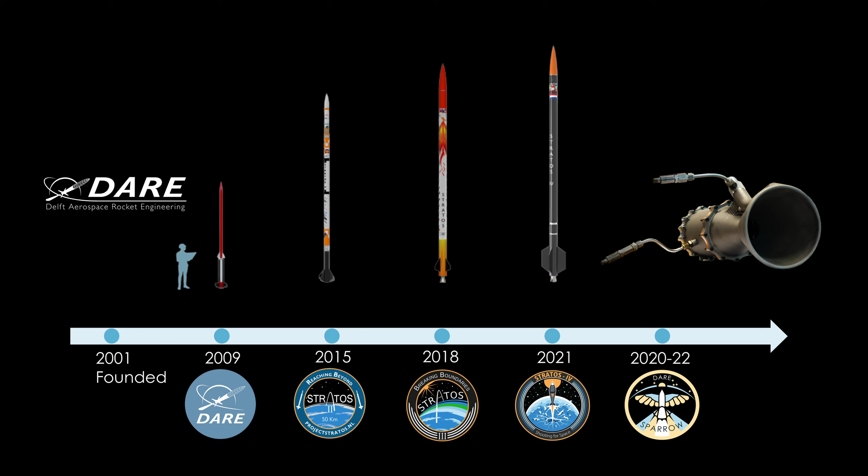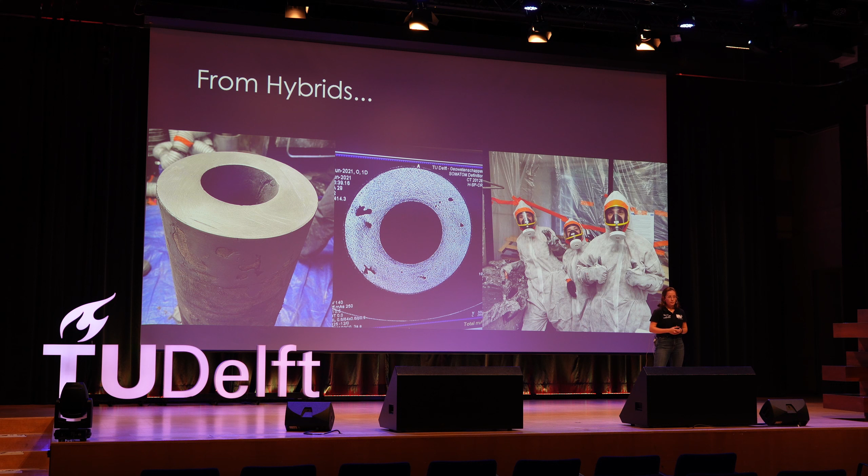Hybrid technology served very well the purpose of Stratos 4. However, throughout the decades we have been developing it, we have also encountered some of its disadvantages. For example, the engine you see on screen, a Nimbus engine of the Stratos 4 team, took over 370 man-hours to manufacture. To put that into perspective, if it had to be manufactured by one person working non-stop without sleep or breaks, it would take more than two weeks just to make one engine.

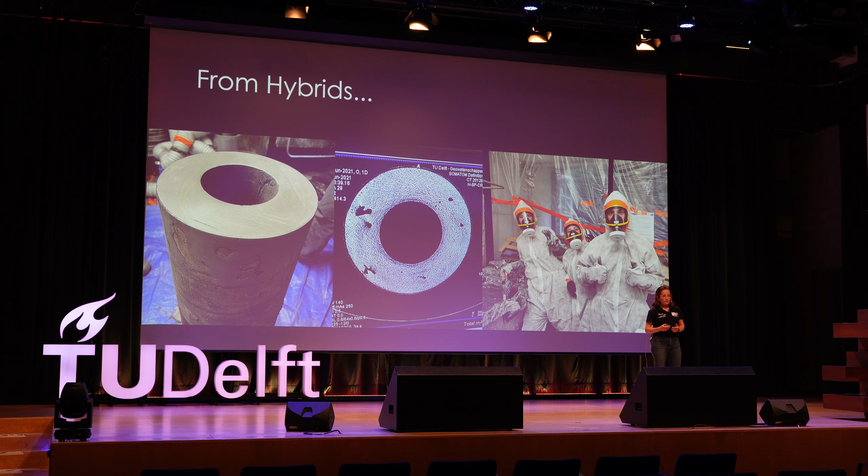So it sounds pretty inefficient, doesn't it? Well, it gets worse. All this work is to make one engine that you can use only once. We were not able to achieve much reusability with hybrid technology, and this also poses a problem when developing an engine, because it can take up to months between one test and the next.

Here you can see the analysis of a Nimbus engine after a test. As you can see, we had to open the engine in two to be able to see its state and how it looked. So you can pretty much not use it again.

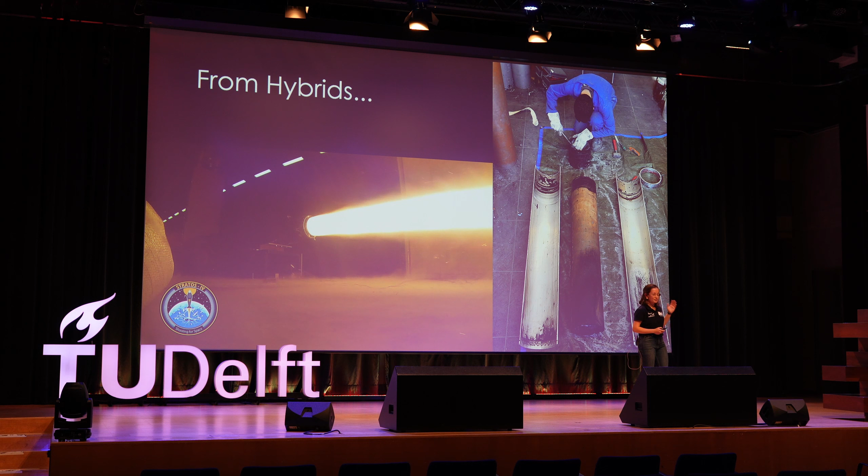So Sparrow decided to move into liquid engines. Liquid engines run on liquid fuel and liquid oxidizer. This means the combustion chamber is empty, and it is the place where both liquids meet and combust. Liquid systems are usually more complex than hybrid ones, but they also offer much higher performance and a more versatile design.

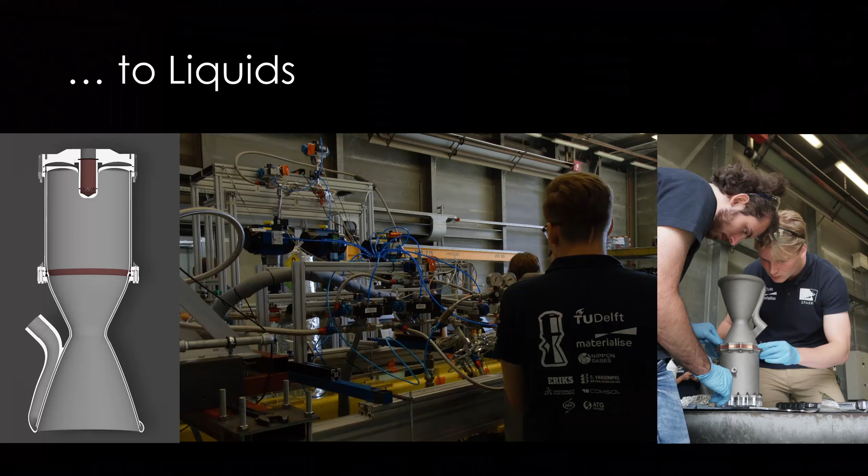The trickiest aspect of designing a liquid engine is making sure both liquids arrive at the chamber at the right time. But the advantage of liquid technology can actually be seen in industry—the majority of commercial rockets out there are powered by liquid engines.

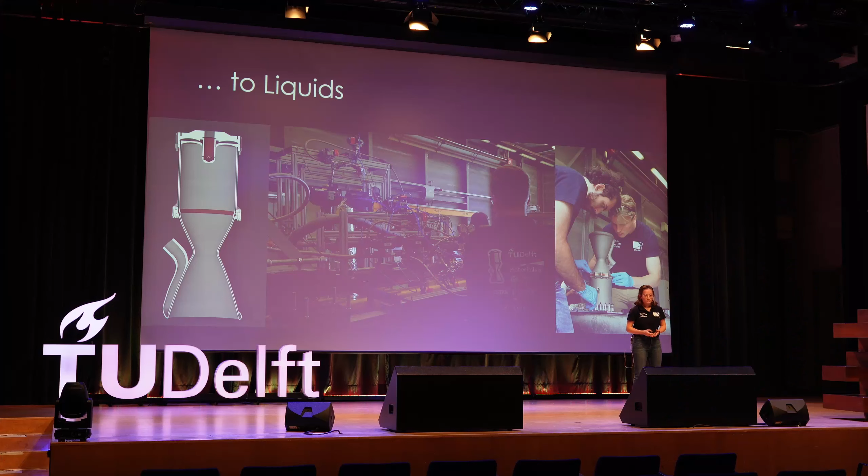The main advantage we found is that, as you can see on the right, that is the combustion chamber of the Firebolt after a hot fire. There is no structural damage. The black marks you see are just combustion marks that can be cleaned, and the engine can just be reused. This means the time between tests is very little, and you can learn a lot about the engine when you test it.

So Sparrow was born with a mission to develop a technology demonstrator for an orbital rocket engine. We wanted to prove that as students, we can develop this very complex technology that is the standard in the industry, and we can do so with very limited experience and very limited resources.

The students that started Project Sparrow actually had very ambitious design goals for the engine. They wanted to make a liquid engine that was cryogenic, with regenerative cooling, thrust vector control, and that could fire for up to 40 seconds. Of course these are very ambitious goals, but they actually drove the students and motivated them to accomplish a lot during the first year.

In just one year, by summer 2021, Project Sparrow accomplished its first milestone. For the first time, we ignited a liquid rocket engine. This is a prototype we call the battleship, a prototype of the Firebolt engine. I want to show a video in which we can see this ignition, and also see the reaction of the team after one year of very hard work that led to this moment.

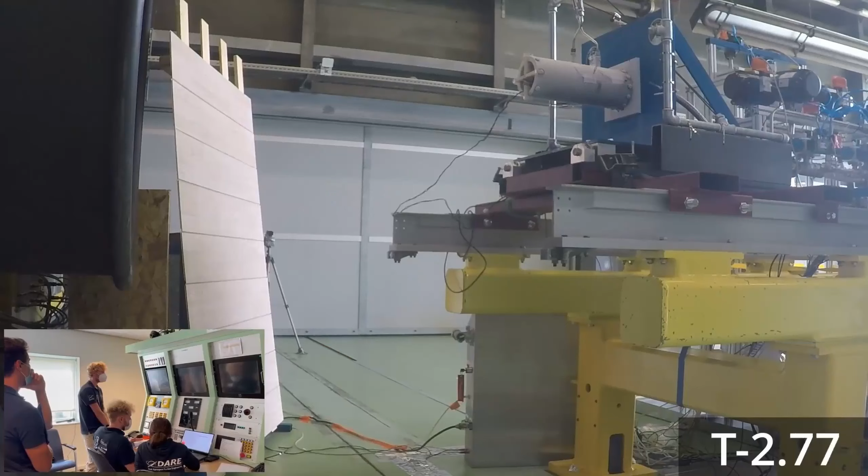So very short, but very important.

Based on this progress, we, as the new green team, took over in September 2021. Based on the progress of the previous year, we sat down and decided on our goals for the academic year 2021-2022. We wanted to achieve a long duration of the Firebolt engine, and at the same time develop a reliable testing system and reliable operations that would allow us to test the engine enough to make a final version. Combined, this would enable the project to move to the phase of rocket design in the next year. These were our expectations, our ambitions, and we were really excited to start working on them.

But then one major setback of the project happened. One day after the successful test I just showed, there was an attempt to ignite the Firebolt engine, which resulted in a failure. This was a very critical moment for the project and definitely a very hard hit for the team. We were quite green, we didn't understand how the system worked, and now we were presented with the challenge of figuring out what went wrong and being able to fix it.

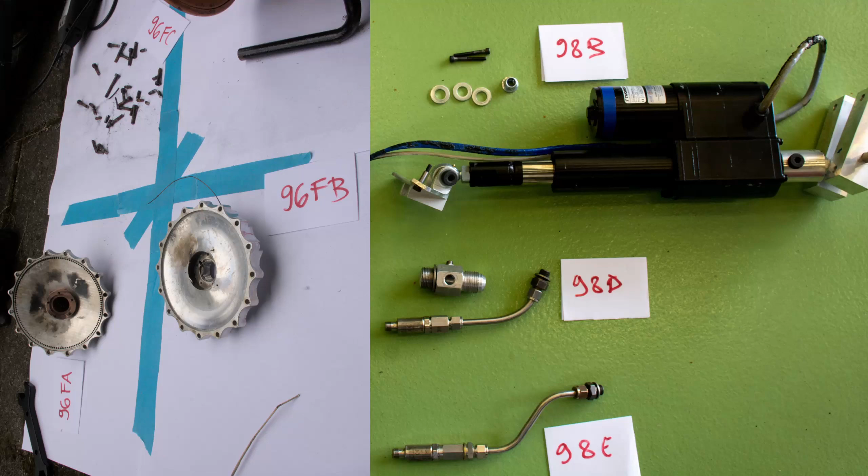Not only did we not know how the system entirely worked, we also had no clue how to perform a technical investigation about its failure. From the get-go, we took great inspiration from how aircraft investigations are conducted. We took meticulous photographic evidence right after the test failure so that we had a lot of evidence to base our investigation on.

Then we decided to perform a root cause analysis. Root cause analysis is an industry standard method of conducting an investigation which helps discover all possible theories or reasons why a failure might have occurred, and narrow down all of these into the ones most likely to have actually caused the failure, the root causes.

For example, if a rocket is to break up in flight, the investigator needs to ask a question such as, why could a rocket break up? The reasons could be sort of trivial but unlikely, like a bird strike, or the rocket becoming unstable and the structure failing. Taking it further, why would the rocket become unstable?

For example, the separation system could fire prematurely, the parachute deploy, or the fins, which are the elements providing the rocket with stability in flight, could break off. This process needs to be taken for all possible branches until all viable theories are exhausted. Then, as many of these as possible need to be disproven, and what is left needs to be proved.

We did exactly that for our failure. It came up with a tree of around this size. We spent a huge number of hours trying to disprove and test as many theories as we could, and in the end we were able to narrow it down to three main paths that could have led to the engine failure.

This small piece, a Teflon seal, should have kept the fuel and oxidizer separate, but failed in this function.

This root cause, two others, and a host of smaller, actionable conclusions were the culmination of half a year's work investigating this failure. We had investigated 48 plausible hypotheses and confidently disproved 33 of them. The remaining 15 could be traced back to the three roots Philip just mentioned.

To evaluate these hypotheses and in addressing their solutions, we often consulted with university professors and industry experts. This was an amazing learning opportunity for us, and it allowed us to implement solutions we could be confident in. It was also amazing, as an aspiring engineer, to observe the enthusiasm these professionals shared with us about our project. The investigation shaped our perspective on our system, and while the process was long and sometimes grueling, the insights gained were invaluable.

We shared our final findings with stakeholders in February of 2022. Our findings were found to be convincing, and our solutions were accepted. Our first test campaign of the year, our first major test campaign, would be conducted there two months later.

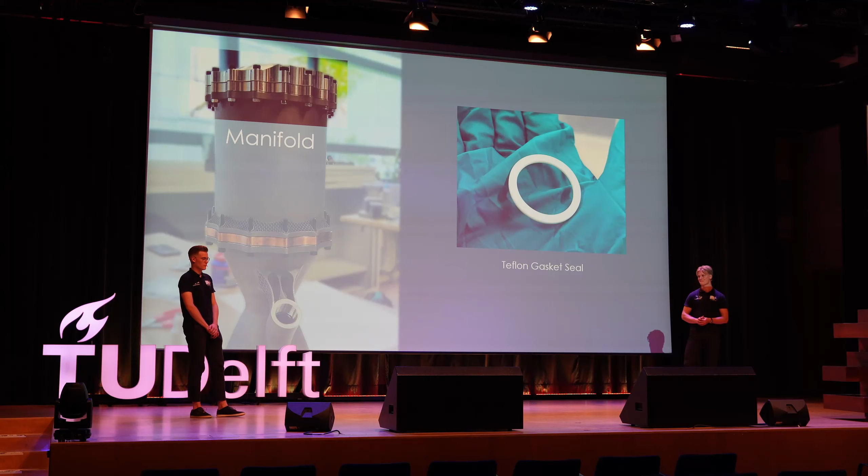Before we could get there, however, we still had the second issue to face. Although the system was clearly capable of performing a hotfire, as proven by the success at the end of the first year, that single successful test was preceded by 15 full days at the test site preparing the system. At this pace, we would never reach our ambitious goals for this year.

There were a number of things to improve. Firstly, data acquisition was poor and unreliable. While developing a complex system, such as a liquid-fueled rocket engine, data needs to be collected of high fidelity on all the technical parameters during the tests. The entire system was based heavily on legacy, unstandardized implementations, which made it hard to work with and unreliable.

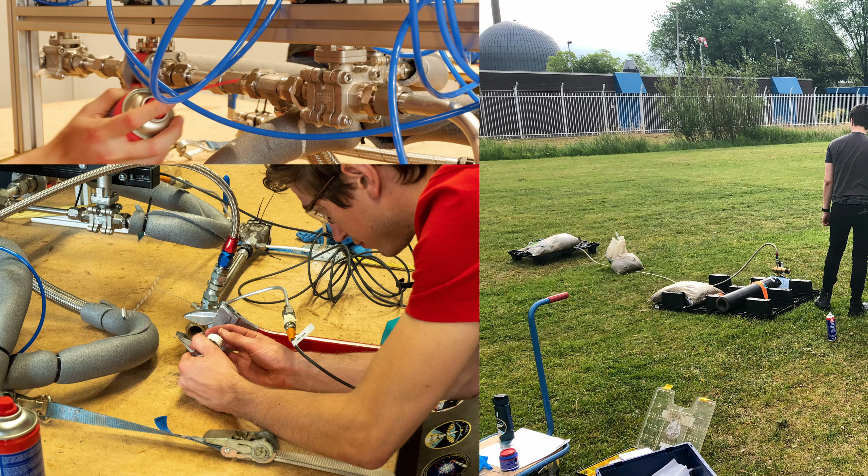We took a similar approach to all aspects of the system. We researched numerous possible solutions, and once a direction was set, we conducted our first tests. These were small in scale initially, and conducted mostly from the comfort of the faculty, or otherwise a small field just adjacent. We gained experience in conducting these tests, wrote our first sets of procedures, and reflected critically on the results. These unit tests built up our faith in the parts of the bigger whole, and once we put them together, we would surely have produced a much more mature system.

This integration was a challenge of its own, and even more daunting were the ensuing validation tests - validation tests of the whole complete system. To discuss these, I'd like to invite to the stage Lucas Hofmann, Chief of Feed and Pressurization.

So now that we talked a lot about these challenges we faced in the first half of our year, I want to dive a little bit more into how we went from design to testing to chasing our goals, which was mostly the case in the second half.

And before we dive into that, I want to explain a little bit about the two major types of tests we conduct with the full team. Namely, we have a cold flow test and we have a hot fire test.

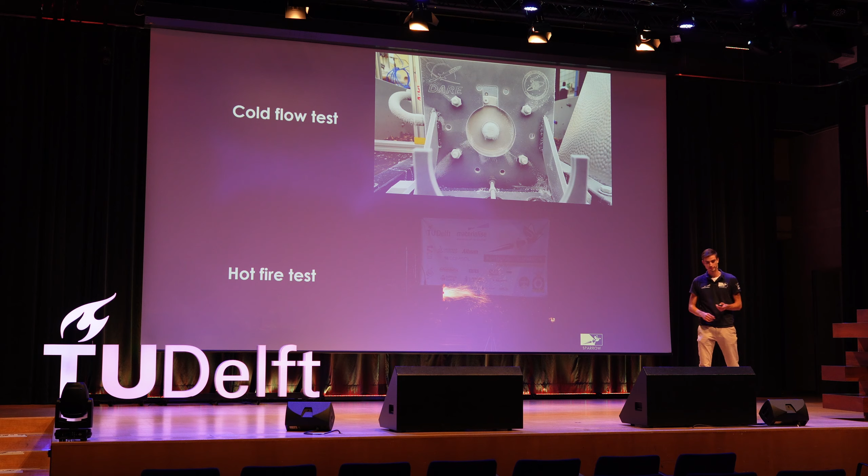So that's how we started out in December. Our first cold flow campaign, we did this one in Delft on a small test site. It was the first campaign we were performing with the full team. It was right before the Christmas break. It was really cold outside.

We were out for 2 days, and we were leak testing our system, and we used this leak detection spray for this. But it was cold enough that our spray would just freeze up to our tubing, so we had to use a hairdryer to get the ice off before we could work on the system again.

But we worked through it. We had some new elements on our system mounted, because we had all these technical departments working over the last months on their individual components. But this is actually the first time you get to see all these components working together, and you have to work as a team to make it work. Because if one of your things is not working, this whole test is not happening.

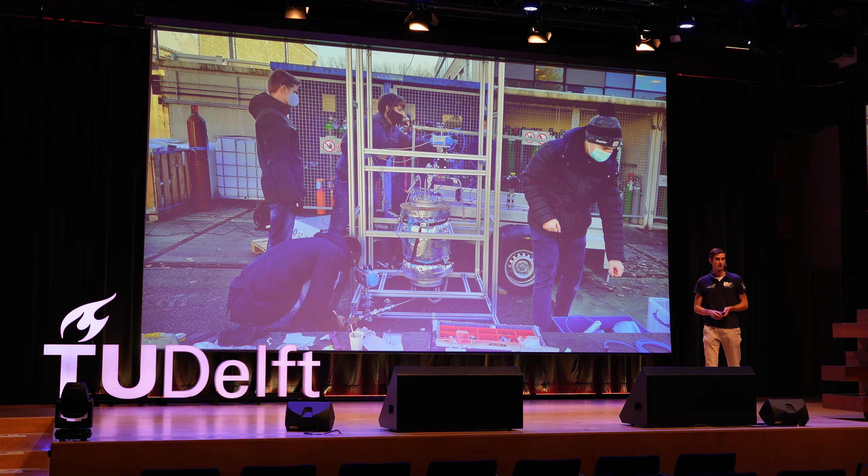And we learned how to work together, and we got some good data out of it. And with that experience we went out again in February, this time for a second cold flow campaign. We went out 3 days. The weather was again not the best. This time we had rain. But we got some good data here.

We had a lot more systems redesigned already, so we could get a lot more insight into how our system that we want to use later in the year will perform. And this was already a really good learning experience for us, because on these kind of tests, not all your components will be working with you.

So there will always be things happening that are out of your control. And you learn from these kind of tests how to get the most out of the hardware you're working with. And with that mindset, we got some really good data on our fuel injection element, and we were really well prepared for the tests that were later to come that year.

So that's when we started looking for our first hot fire. We had set up our systems. We had prepared our systems for these cold flows, but we wanted to validate that these systems actually work all up to spec. And that we wanted to do through another hot fire on our battleship prototype engine.

And this is the same thing we did 1 year ago already with the old system. But now that we did all this redesign, it's really important that we show that these redesigns are functioning properly before we go to this higher risk test with the firebolt.

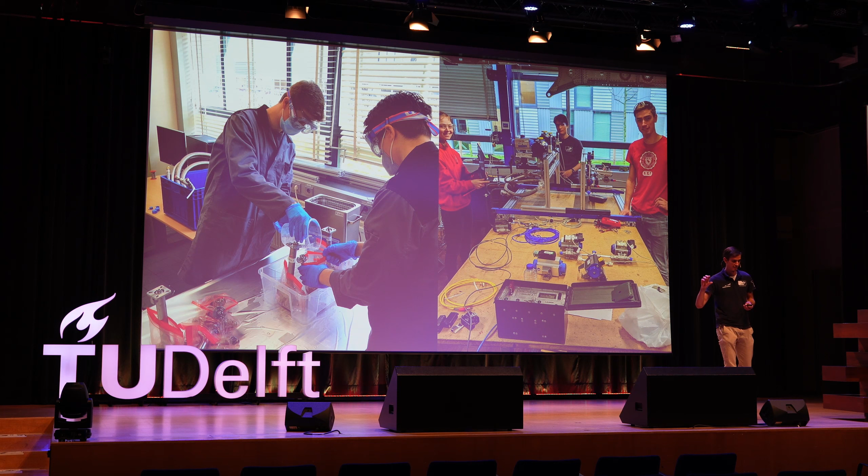And we started running a lot of system tests, because the preparation will actually determine what's going to happen at your hot fire campaign. At your campaign, you have very little time to run all your tests. So the better you prepare, the more you focus on your details here, the smoother your hot fire campaign is going to go, and the further you're going to get there.

So that's what we did. We spent a lot of time, a lot of hours in the lab together, and it was really nice to work together as a team here.

And one of the big steps we take in this preparation is we do a dress rehearsal. And during the dress rehearsal, we go over procedures. This is sort of a step-by-step guidebook that we write that lists all the steps we have to take from assembly to the hot fire test. And for us, this is really important that we get our efficiency up, because all these steps we're going to do at the test site are already listed out.

Most importantly, we can make sure that it happens safely, because these procedures are written in a way that we come up with every scenario that could happen, every system state that we could end up in, and write out a plan of what we're doing. This is really essential for our test crew. On this picture, you see your test crew together practicing these procedures. This is again a moment where all our departments come together, and you have to work together as a full team.

By April, we were ready for our first campaign. That's where we headed out to our test site. We packed up all our stuff and started setting up our system. This was also the first time we were working with liquid oxygen and ethanol. We went through a lot of safety reviews and system checks to make sure our system is actually working up to spec, because liquid oxygen has serious hazards. So we had to approach this professionally and make sure every component was working up to spec.

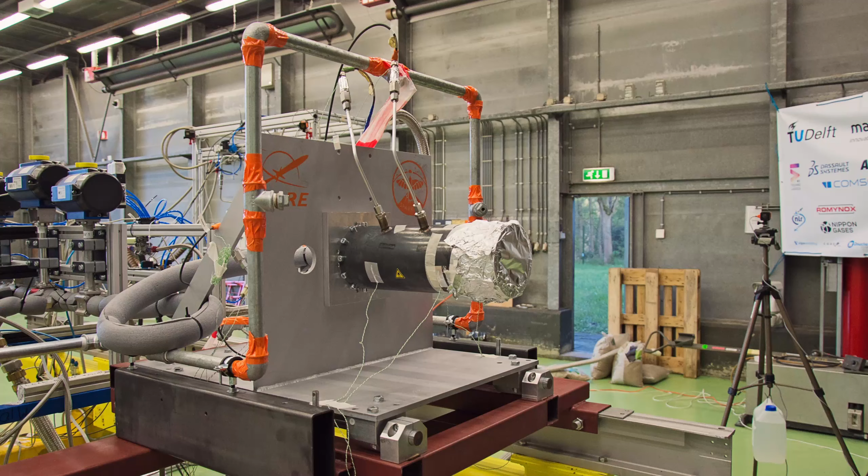But after 3 days of setting up our system, we were ready to test. We have our battleship prototype engine mounted on this picture. This campaign really showed us that all the prep work we put in, all that effort to look into the details, helped us speed up a lot. So we wanted to go for 3 cold flow tests first to gather more information about our system before we'd go for a hot fire.

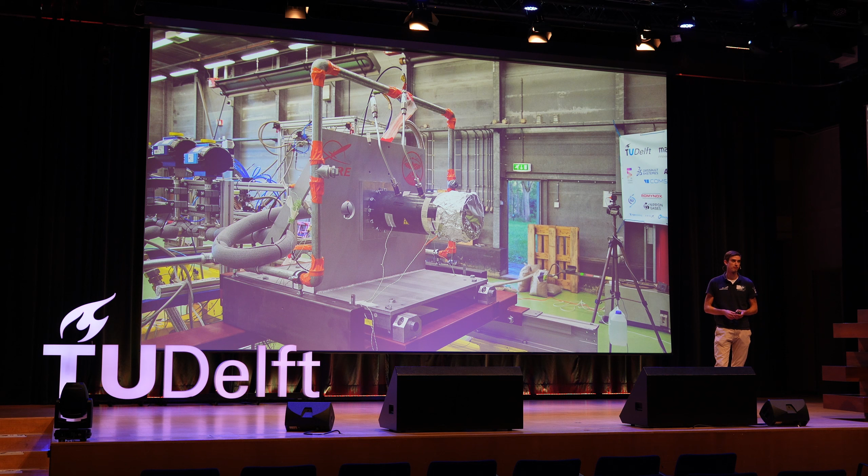We did our cold flow tests, and then on Friday morning in April, we got the first chance to do a hot fire test on our battleship engine with the new team, with the new setup, and this is how it went.

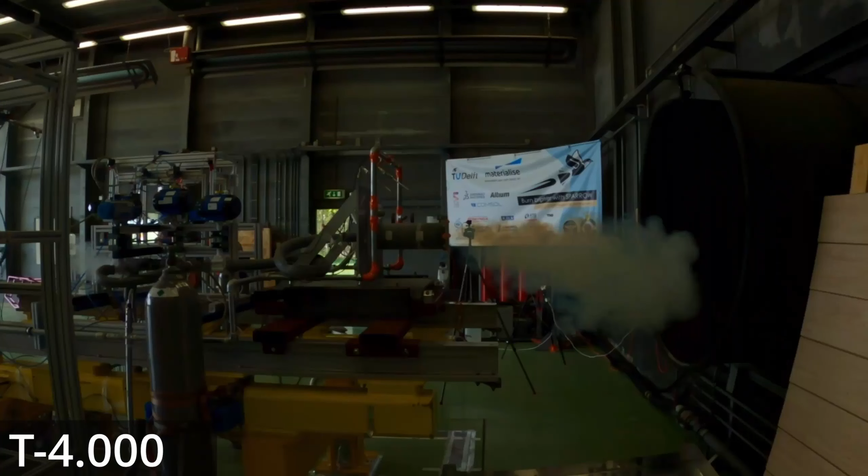We had a really successful hot fire. This was the first time that we showed our new system is capable of boosting up, firing up this engine, igniting it, and this was a really big milestone in the project. We showed with this engine that we could produce enough thrust to lift up a small car. And as you saw in the background, there was still some blast shielding falling. There were things that needed to be fixed, but we were on the right track to get to our bigger challenges.

One of the things we also showed at this campaign is it took us about 4 days to get our system ready for this hot fire. And what Carmen told about us before, that we needed 15 days to get the system ready for our first hot fire - this was already a really big improvement and would really help us later on in the year.

But it was still April, and our year was far from over. We had a lot more time. We got really ambitious after this, because these kinds of campaigns really give you the feeling that with this team, any big challenge, you can face it together, you can get through it, and you can solve it.

So that's when we started looking again into firebolt. We had this big investigation performed earlier in the year, and we had our recommendations, but now it was time to actually put that to the test. So we got into our preparations. We got ourselves a new engine. We started manufacturing smaller things we needed for the setup, because there were a lot of small things we wanted to tune and adjust to improve the system, make it more reliable, and get it ready for the big test.

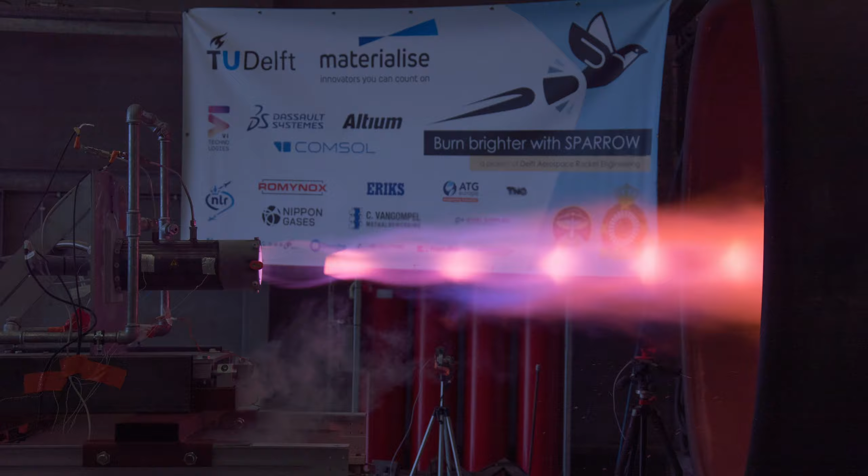And this time around, we put the more expensive camera in the room. As we got some more confidence in our system, we took some really nice pictures of this hot fire. And we did this battleship engine test again because the battleship is really nice for research on, for example, our ignition sequence and how close we can hit our engine performance targets.

This engine would melt down if we burned it longer than 2 seconds. But the safety factors are a lot higher because this is basically a steel tube. This has actually been passed around at the Symposium last year, and we refired that same engine again.

But after getting all that data in, it was time on Thursday to mount up our firebolt engine. And the team got really excited here because this was the first time we were going to do a hot fire test and cold flow test again with our firebolt. And so we set up the system, and we did some cold flow tests with it.

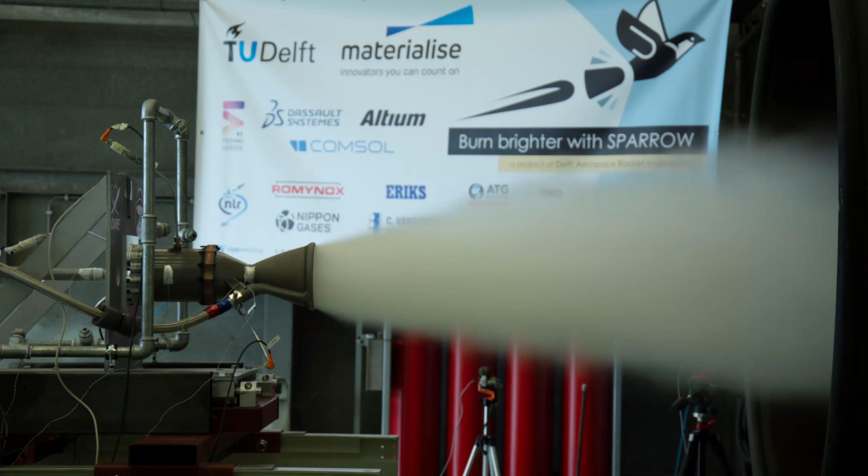In total, we did 3 tests. We were running through all our time on Thursday. And we had one more window on Friday morning, one more testing window to do one more test on this engine. And so we did our data analysis on Thursday evening.

And on Friday morning, we had a hardware team setting up the engine again. We had the test crew filling up the propellants, and we had a data analysis team fine-tuning our test parameters. And suddenly we were there again, that point, the decision point, where the team was 1 year ago, before this whole investigation, deciding, are we going again for a hot fire or not with this engine?

So we had this meeting with the team. The goal was here to demonstrate that we can successfully start up this engine. We would only fire it up at full flow for 1.1 second. But this time we were way more prepared. We had this investigation done, we had all these recommendations implemented, and we had a lot more knowledge gained about the system from all these small tests we conducted at this campaign.

So we decided we go for it. We had to push for it. We had to make this push for innovation. And the next hour, the test crew was getting the system ready for hot fire. And that was by far the most nerve-wracking hour of the full year. But we went for it, and this is what happened.

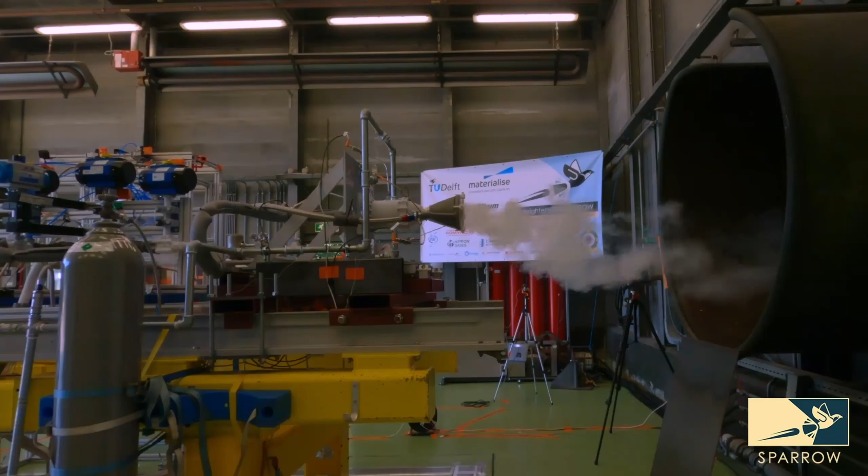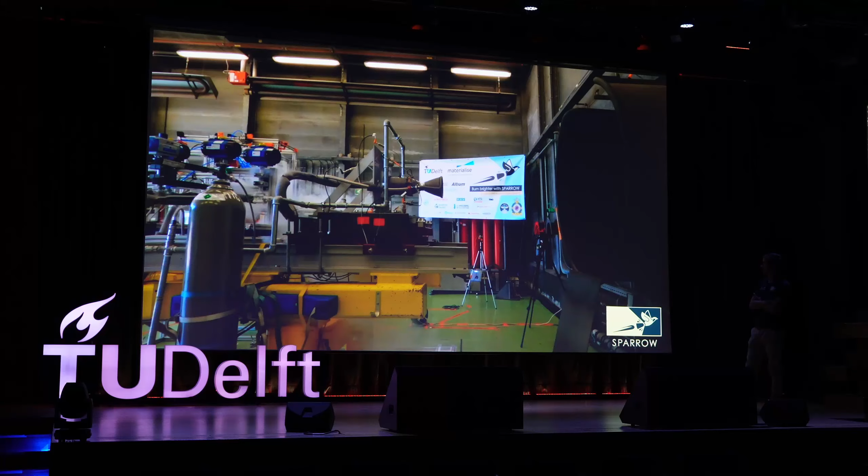We had a successful hot fire of our firebolt engine, starting it up for 1.1 second. And this was a really big milestone. This was the first time we were able, with DARE, to start up an engine, regeneratively cooled, 3D printed, and liquid fueled. And with this test, we opened up a huge window of opportunity for a whole set of new research on these kind of engines, but also this showed how much potential these kind of engines have for the future of DARE.

And we wanted to chase that. We wanted to go for those bigger milestones, because this project was not over. This test campaign was in July, but we still had a bit of time. So that's how we organized another testing campaign, conducted 4 weeks ago from today.

It was our final one from our team. And we went back for more. This engine is designed to burn for long durations. It is cooling itself during the burn, so in theory you could burn indefinitely with it. But sadly, we have tanks that are limited, so we cannot go for too long. But we wanted to go for more.

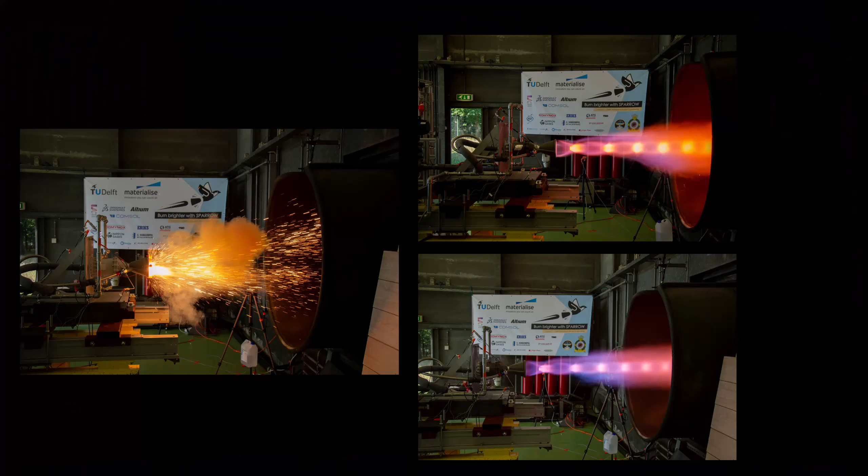And we set up our system 4 weeks ago, and we hot fired again, and again, and again. And with the same engine, we showed that we're capable of firing it up for long durations. We went up to 15 seconds with this engine. We showed that the cooling through our cooling channels in the walls of this engine works.

The inner wall thickness of this chamber is about the thickness of a fingernail. And it's able to carry away, over that thickness, the immense heat of the combustion, and transfer it through these cooling channels away. And what I think is even more impressive is that this same engine we fired up 4 times now, reaching a total of 30 seconds on full propellant flow, and we did minimal refurbishments in between. That's really where this liquid fuel technology is showing its potential.

And with these tests, we started outperforming our test setup. We ran to the limits on what we can do with our current tanks.

And yeah, this is a setup that is all student developed. We were able to create a test bed that can run these kind of rocket engine tests. And we were able, with a student team, to develop an engine this complex that can meet our design parameters. And with that said, I want to hand over back again to Nathaniel.

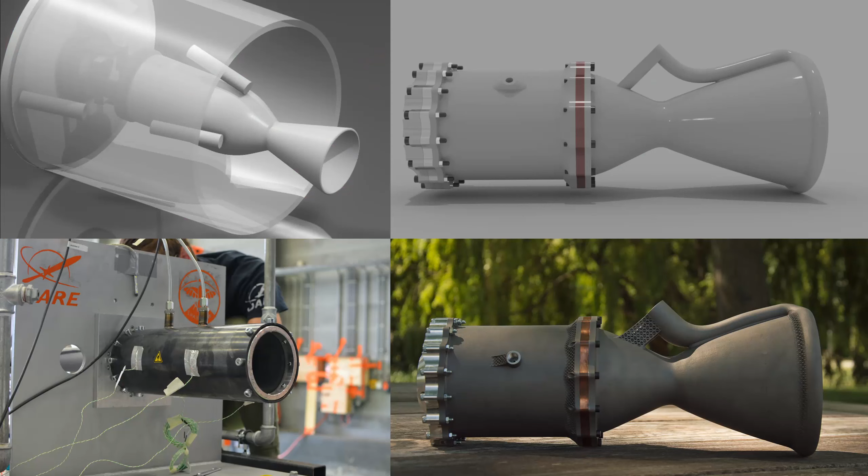I wanted to recap a little bit what we've seen over the past 45 minutes and how far the project has come over the past 2 years. We have gone from a dream to a design to a prototype to an actually fully functional rocket engine over the span of 2 years. We have shown that we are capable, technologically but also as engineers, to take on this challenge and probably even larger challenges.

We have developed technologies that had not been seen in DARE before, for example a turbomachinery system that might be used on later iterations of this engine. We have become quite key players, as I mentioned at the beginning of the presentation, inspiring many others. In fact, recently we heard back from the International Astronautical Congress in Paris that people there knew us, knew our name, and said that they were inspired by our engine.

And most critically, as Lucas mentioned, we have outperformed our test setup. We cannot go much further in developing this engine with this current test setup because we're limited by the tank size we have, for example. So we have not even reached the full capabilities of this engine, and it is already performing so well. We have not even gotten close to the maximum temperatures that it can withstand.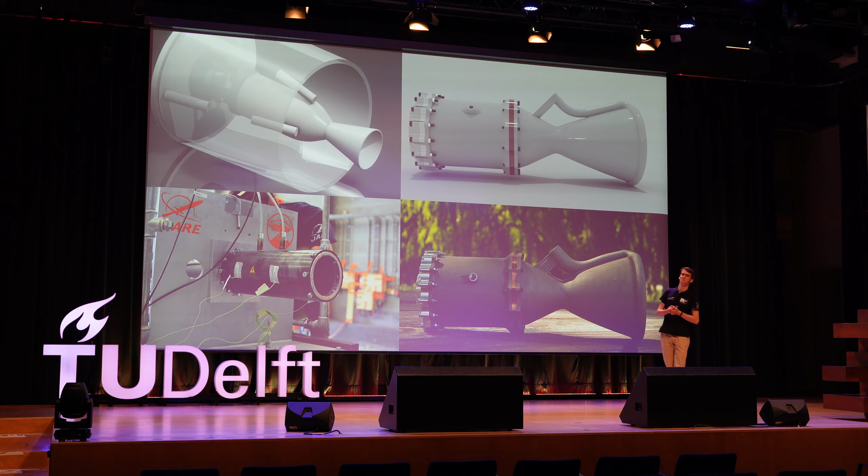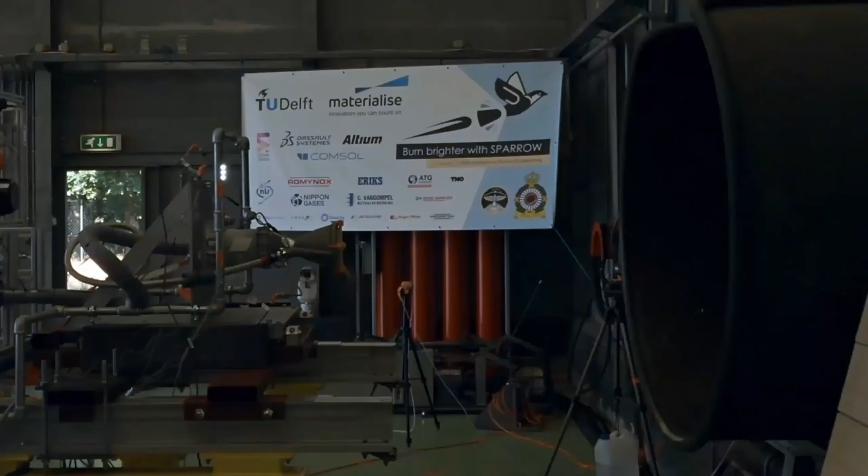10, 9, 8, 7, 6, 5, 4, 3, 2, 1.

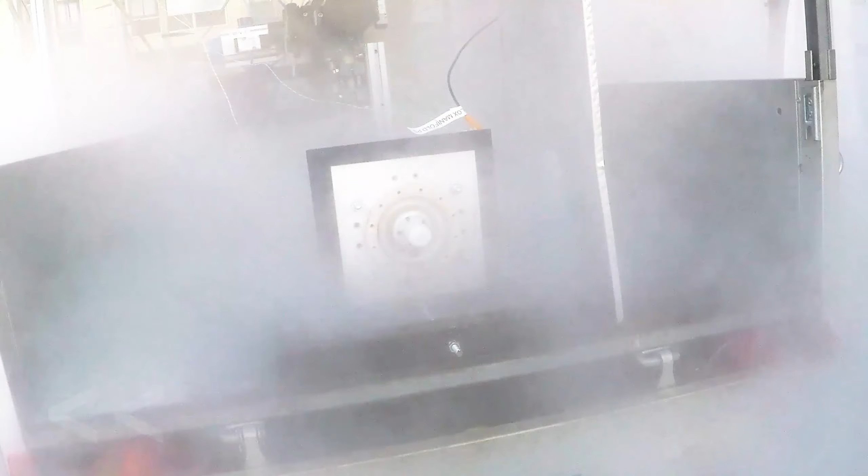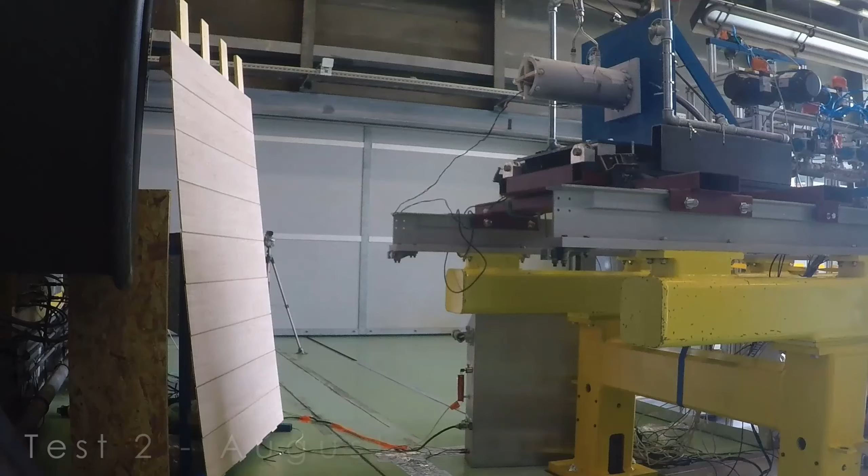More than 1 year ago, we started with the ambition to develop a reusable liquid rocket engine with an amount of power not seen in the Netherlands in over 75 years. We indeed had a successful hot fire of our battleship engine for 2 whole seconds.

So over the past summer, we have already spent a lot of time researching, learning, planning, and debating on how to move this project forward.

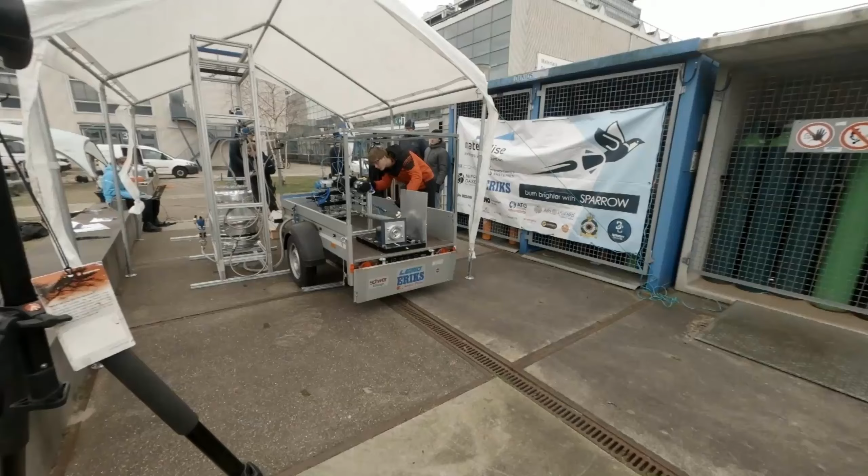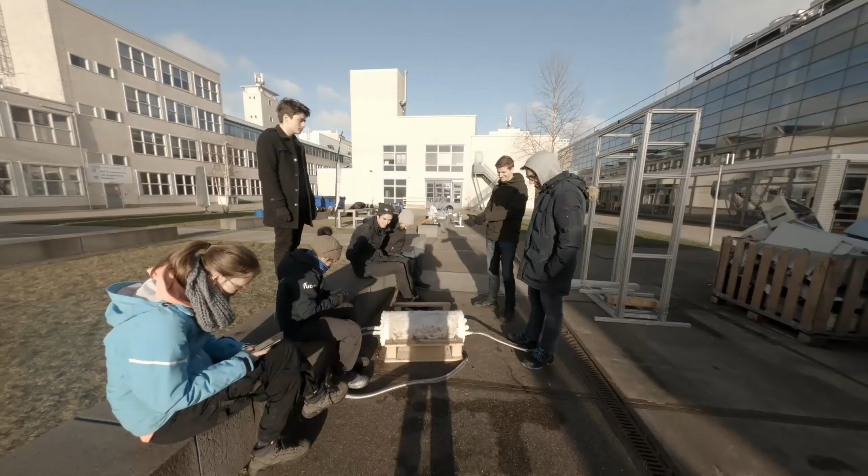We're developing Firebolt to run on liquid oxygen and ethanol, making it the first engine of this type ever developed in the Netherlands.

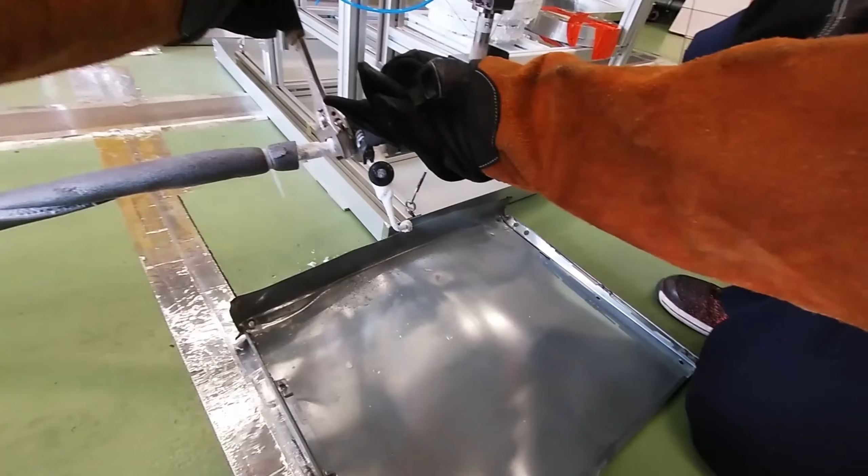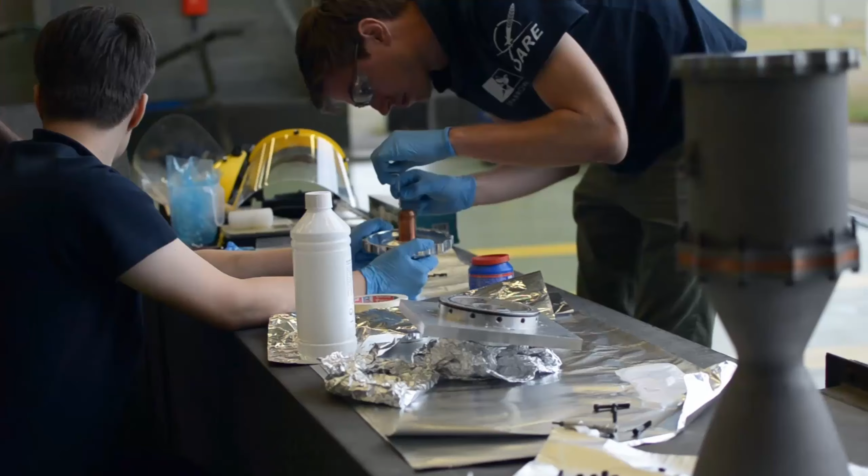So we're now getting ready for a hot fire, which means that we will actually put an igniter in our engine and we'll simulate how it would look if it were on a rocket and when it would actually fire. 4, 3, 2.

And with that, I'd like to hand over to the team manager of the brand new Stratos 5 project, Luke.

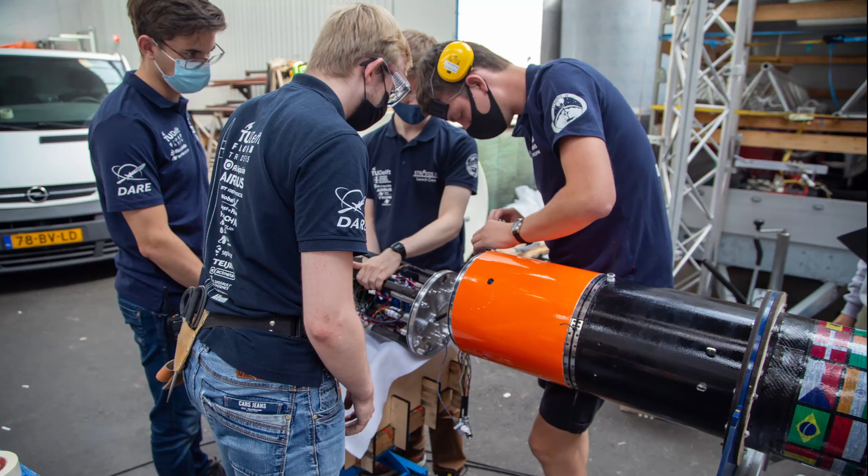Flagship rocket projects within DARE have always been developed by large groups of students passionate about rocketry. They've wanted to make a difference, and to experience building systems that typically aren't touched within their academic student lives. This is a photo from the Stratos 4 launch campaign, where you can see them integrating an electronics package into the top section of the rocket.

With each flagship team having a seemingly more ambitious goal than the last, we continue to push the boundaries of what our team and our students know is possible. This allows for the development of knowledge and skills crucial in the field of engineering.

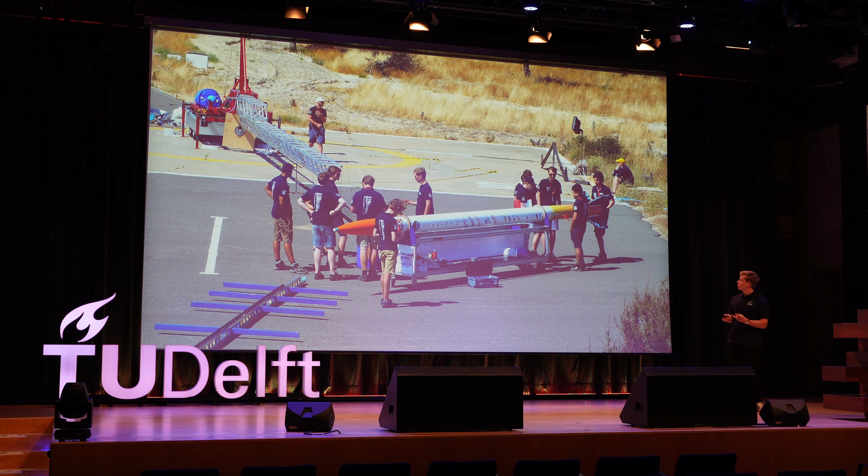Here we have an example from Stratos 3, the 3rd generation, where we can see a launch tower integration.

Most team members dedicate multiple years to these projects. Teams go through all sorts of environments, working together to solve unique challenges, giving real-world experience. Everything from design, manufacture, campaign logistics, and launch is all conducted by students.

Stratos 5 hopes to continue pushing these advancements forward, utilizing all the technical breakthroughs we've gained in Project Sparrow. This engine really represents the next big technological leap within DARE when it comes to flagship rockets, having numerous advantages that will push our project forward.

After seeing the scale of these projects, I'd like to introduce more about what our defining features will be. We are a team of 18 full-time students and over 40 part-timers. There are three main things I'd like to focus on.

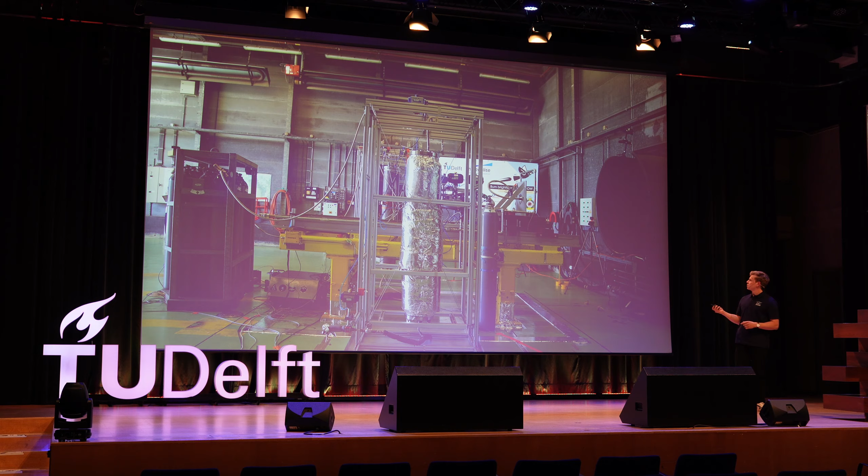The project is currently in its infancy, and we've already begun this fall. I hope you've enjoyed hearing a little about the project and what the next step for the team is. We're all super excited and really want to show more. In the coming months, we'll slowly announce more about the project, what our next steps are, and when you can expect to see things happen. So I would now like to pass back to Nathaniel, who will come back on stage and wrap up this symposium.

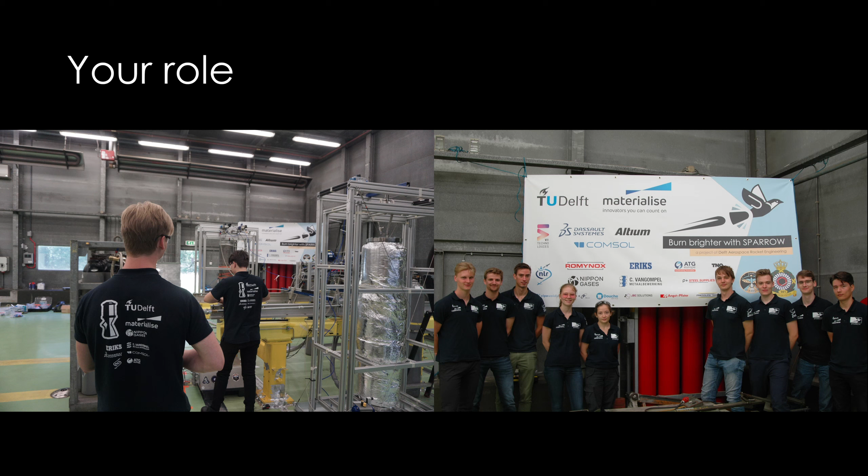Thank you, Luke. Yeah, it makes me really excited to see that our project, our little baby, is being carried forward into this new and exciting age for rocketry. I've already mentioned that we are concluding the project and evolving, but before we do that, there are a lot of thank-yous in order. I mentioned at the beginning of the presentation that our family consists of 65 students, but that was not completely true. There are actually a lot more people who contributed to this project.